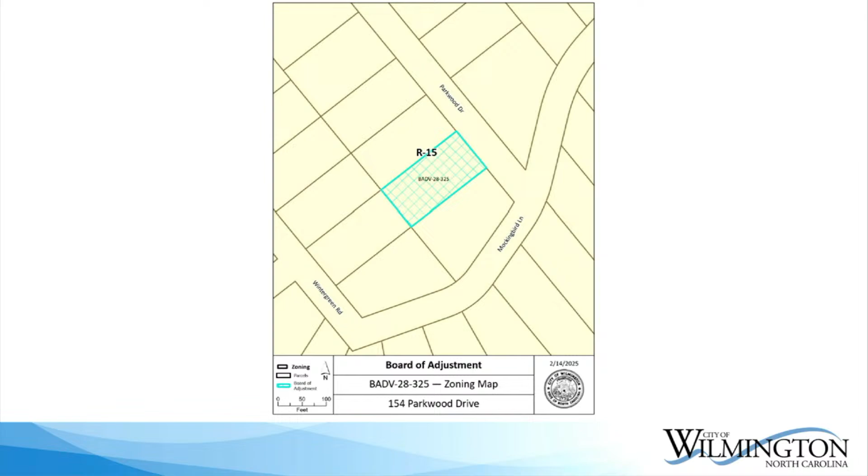On or about November 27th, 2024, the applicant received permitting approval from both City Zoning and New Hanover County Building Safety for the construction of a detached 11 by 30 lean-to carport with a proposed 3-foot setback to the side interior property line. In February of 2025, City Zoning inspected the subject property and determined that the structure did not comply with City Code Section 18-199, which requires that detached accessory structures shall be located a minimum of 5 feet from side interior property lines.

On or about February 26, 2025, City staff accepted an application for a variance to the required side interior setback for the accessory structure to remain as permitted. When the need for a variance is related to an error on the part of City staff, the City of Wilmington fee schedule states that no application fee is required. This matter was continued from the March 20th meeting and is set for hearing before the Board of Adjustment on May 15th, 2025. I'd like to submit the staff report and all attachments to the record. I'm available for any questions, as well as the applicant's representative, and I believe they have a presentation as well.

Any questions for staff? Okay, thank you. If the applicant would come forward.

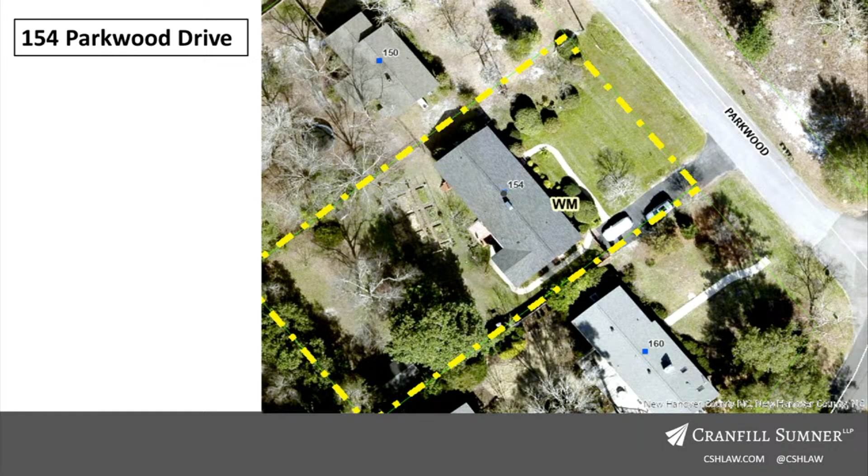And you'll see this aerial depiction of the property. I'd like to note for the board that the driveway, which pre-existed the carport, has already been there for several years and is very close to the property line. I'll also point out in this other aerial, there are 2 houses adjacent to Mr. Lane's property. One is a property with a driveway that's on the far end, the far left of Mr. Lane's property, and another is a corner lot which has not 1 but 2 driveways connecting to a separate street, Mockingbird Lane.

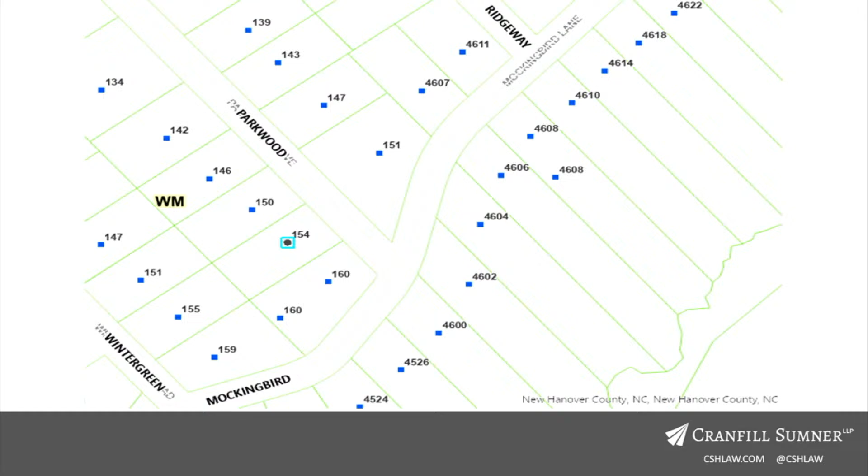They are 4 feet separating both the carport and the house. So if the carport were moved any closer to the house to comply with that 5-foot setback, those stairs would be blocking a car from entering the carport.

Now, this permit was granted due to what I think is a very understandable issue. If you go onto the county's website, and there is a link on the city's website that will eventually take you there, you'll see there is an option for accessory new structures, on a page called 'Do I Need a Permit?'

So Mr. Lane, before he even commenced building this carport, was trying to figure out the rules. He looked at this site and selected carport. There, in his layperson's opinion, and in my opinion as an attorney as well, he saw a requirement for structures greater than 400 square feet. What we saw a moment ago was a carport that was 330 square feet. So in Mr. Lane's mind, he didn't need a permit to proceed with building the carport.

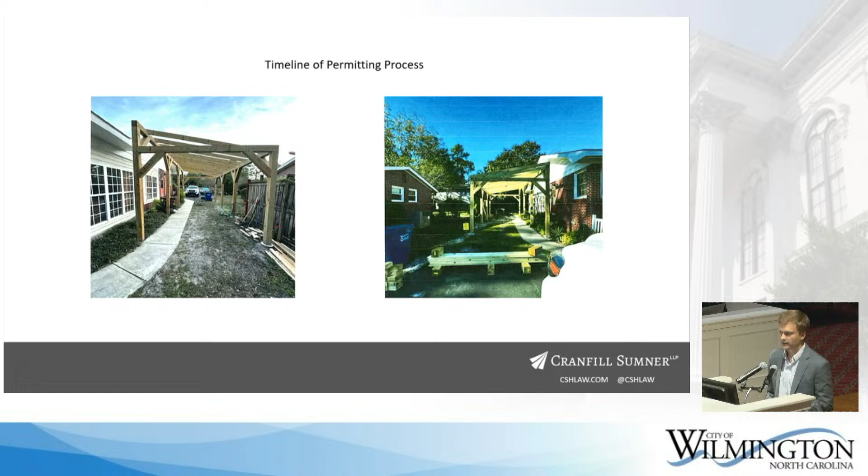A little more context: this interpretation, I think, was due to another misunderstanding, but a legitimate one, of the rules that existed, particularly at the time he was building this late last year.

Mr. Lane was informed that if he coated the carport with special fire-resistant paint or made a 1-hour fireproof wall, he could potentially keep his carport where it was. Due to cost and other considerations, he ultimately decided to dig up the carport and move it over a foot to comply with the city's directions.

I'm interested in what he said about the fence. I don't understand what you mean when you said the fence goes 6 inches down into the ground. What do you mean by that? You can approach, yes.

I was referring to a 6-inch silt fence. My client understands the details a little bit better than I do. It was my understanding that it was designed to prevent water damage. As far as where it goes, I don't have that information. Well, I can tell you that doesn't make a lot of sense. I can understand where the posts that he put up to support the prefabbed panels may be sunk that far, but the actual fence is not.

Don't get me wrong, I don't expect y'all to make him tear this down, and I honestly don't want him to tear it down. I don't want to cause that problem with my neighbor. But somebody made a mistake—I don't know, city, county, whoever—and this really needs to be corrected, because the next person in my situation shouldn't have to go through this. I can't tell you how much stress this has caused me since September, thinking about the possible cost that's going to occur to me down the road somehow. But anyway, thank you.

Forgive me, this is sort of a question for both of you, because I noticed the downspouts and the drains. The gentleman for the applicant indicated the water doesn't go towards your property, ma'am. On the other hand, we've had a lot of rain. So two questions: for him, where does this water go, if you know?

And for you, ma'am, considering we've had a lot of rain, have you seen evidence of this system failing to keep the water from flowing towards your property? I know your property's a little bit downhill. We noticed that, but—well, thank you.

Actually, I went out yesterday when we had the big rain, and with that it was fine. I have no problem with it the way it was. I guess my concern is I just don't know when the next hurricane's going to come, and that type of flooding. The rain storms we have, which are usually quick, could be very intense but quick. But he's correct, we do have sand and it does drain.

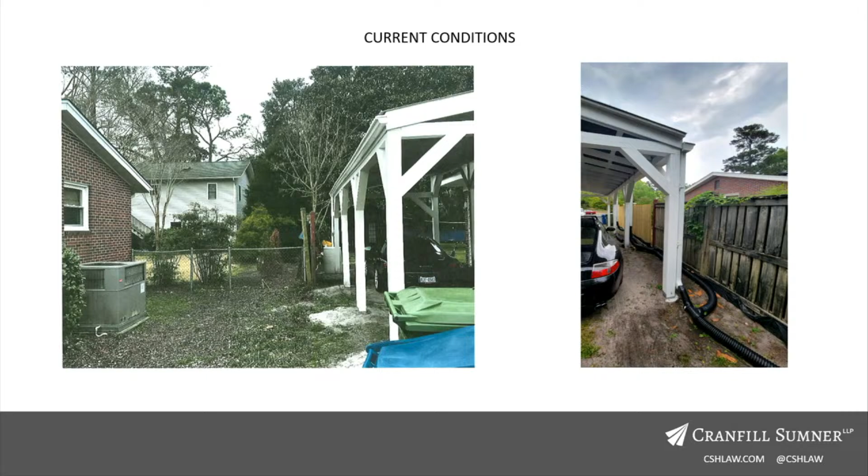As far as those black pipes or whatever they are that are coming out, I really hadn't noticed those. I'm not sure, because I was told—since I don't go onto his property—that there were going to be rain barrels. So I'm not sure where the rain barrels are as opposed to this black tubing I'm seeing.

Thank you. So to add on to that, I was in communication with my client, and he informed me that the roof gutters drain into 4-inch plastic corrugated piping to the center of Mr. Lane's yard. That is not just moving it further down the property line—it goes to the center of the yard.

And I would also—I think the board may have used this tactic in the past—suggest that they can attach certain conditions if any particular aspect of a variance is something that they think deserves a little bit more caution.

And again, as a thank you to Ms. Parham, I think she mentioned earlier the right result might not be to make my client take down the carport. Again, Mr. Lane attempted to do everything right. He went through the permitting process, he called people, he made adjustments, and we find ourselves here today. We are grateful to the city for waiving the application fee, in addition to giving us this opportunity to try to make this situation right.

Thank you. Anything further from Mr. Lipscomb? Thank you. Anything from the city?

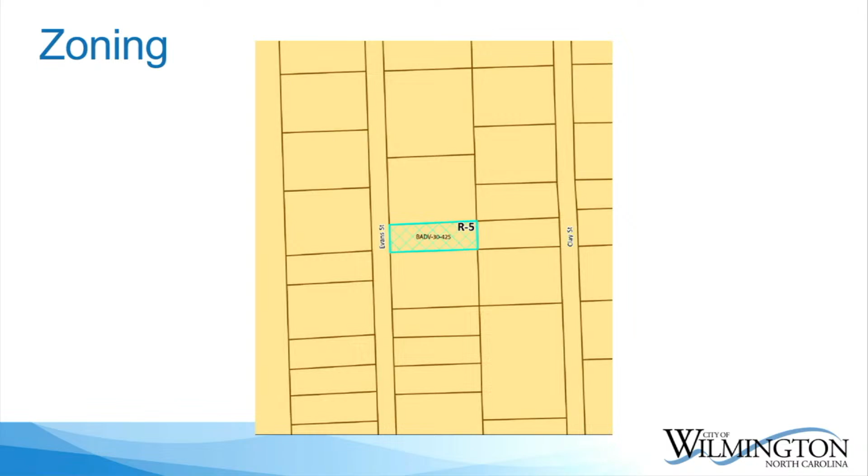Yes, please. The subject property at 420 Evans Street is zoned R5 and is a vacant lot of record in the R5 district. That district requires newly created lots contain at least 5,000 square feet and have a minimum of 50 feet of width. The subject property, though, is a lot of record in the Fox subdivision, made up of 2 lots, recorded in New Hanover County Registry, Map Book 2, page 108 — you can see that lightly on your screen. It's from 1926. Lots within that section of the Fox subdivision are generally 33 feet wide and 92 feet deep, which is consistent with the dimensions of the subject lot.

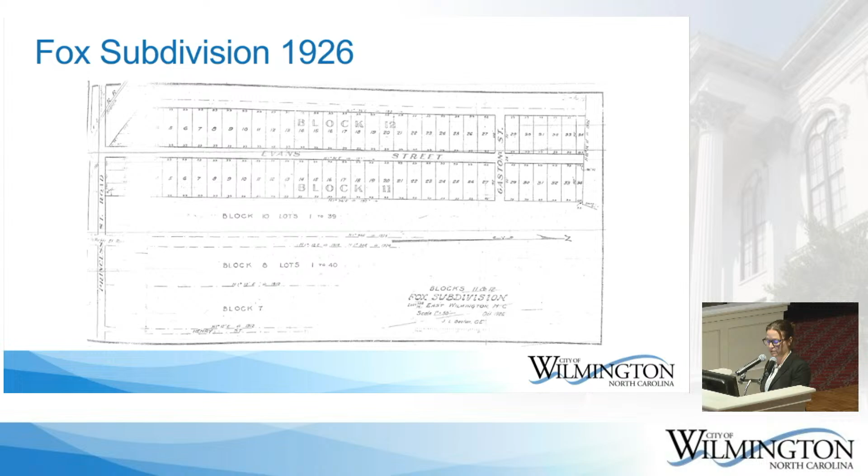The applicant proposes to develop the property for residential use and has requested a variance to allow the new structure to meet a 5-foot side yard setback rather than the 7-foot setback required by City Code Section 18-28. The subject lot is 17 feet narrower than the standard R5 lot width of 50 feet, and you can see the required dimensional standards for the R5 district.

The applicant stated in his application that strict enforcement of the ordinance would significantly constrain his ability to develop this lot. And you can see, based on the lot dimensions, it's really more consistent with the standards for an R3 district, and those are the setbacks he's requested on the side yard.

In the applicant's narrative, he also stated that the proposed use would be a duplex. However, the lot is not large enough to accommodate a duplex in the R5 district — he would need at least 7,000 square feet — so this would be for side yard setbacks for a single-family dwelling. This matter was set for hearing at the April 17th meeting and is before you today on May 15th, 2025. I'd like to enter the case summary and all attachments into the record, and I'm happy to answer any questions you may have of city staff.

Ms. Thurston, so this is for a duplex, which would not be allowed even if a variance were to be passed — is this not something we should be requesting a variance to the dimensional standards for a duplex? No, the lot is not large enough to accommodate a duplex. He requested a variance to the side yard setbacks, so it would be for a single-family dwelling. Okay, thank you.

And this lot is consistent with other lots in the area? It is. This is one of many Fox subdivisions. You can see blocks 11 and 12. There are Fox subdivisions, block 9, 8, 7, just all in that area. Some of them do meet the 50-foot lot width, but many of them were developed as 33-foot wide lots.

Thank you. Why do we automatically assume it's a single-family dwelling since he asked for a duplex? Because that is all he's allowed to build there based on the lot area. But he hasn't actually changed his request. No, he's not present to address that either. So if we approve the variance, the only thing allowed based on the variance would be a single-family dwelling?

Right, and those aren't necessarily the lot lines. So the lot directly to the south is actually a double lot. They built in the middle of those two lots, so they kind of effectively combined them, but those are really two lots of record. Because they were developed that way, the tax department issued a single parcel ID number rather than two separate tax bills. But very few of the lots in this subdivision have actually been formally recombined, so most are still 33 feet in width.

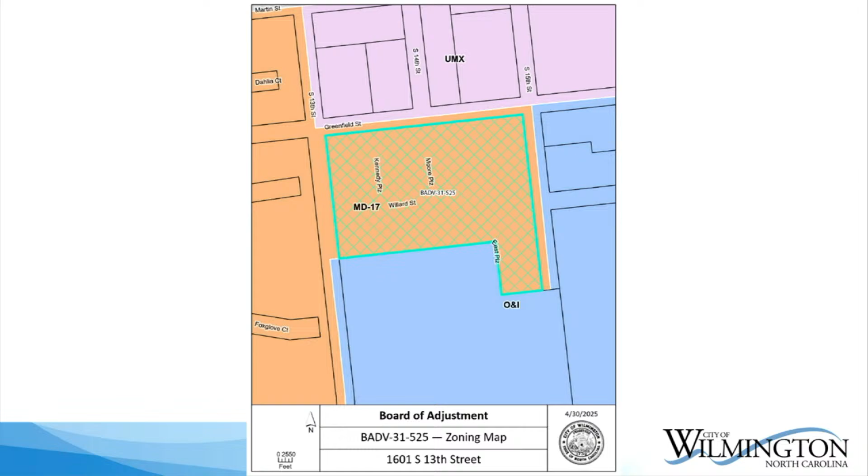All right, good afternoon, Mr. Chairman, members of the board. I'm Grace again, Zoning Planner 1 for the City of Wilmington. Item 3 today, we have the subject property, 1601 South 13th Street. It's zoned high-density multiple dwelling residential, the MD-17 district. It contains a multifamily housing development known as the Houston Moore Apartments currently.

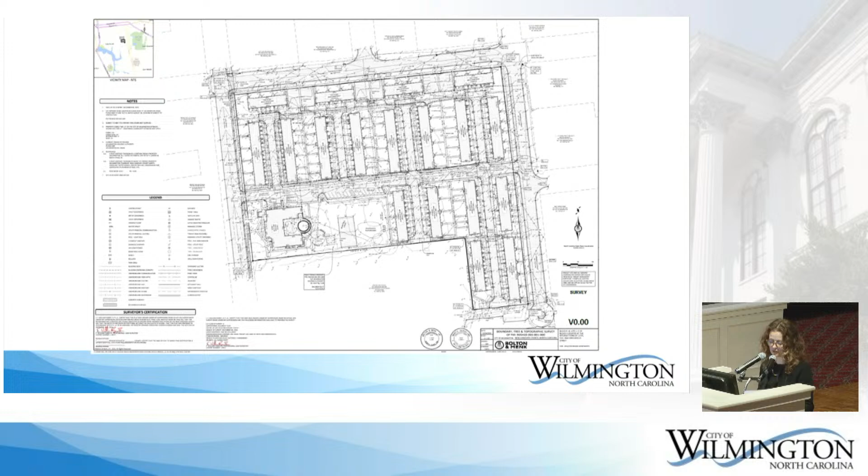On or about April 22nd, 2025, a redevelopment plan for the demolition of all existing structures and new construction of 2 buildings with a total of 200 units was submitted for preliminary review by the city's Technical Review Committee. The proposed new construction would occur in 2 phases and would involve the removal of up to 3 specimen trees.

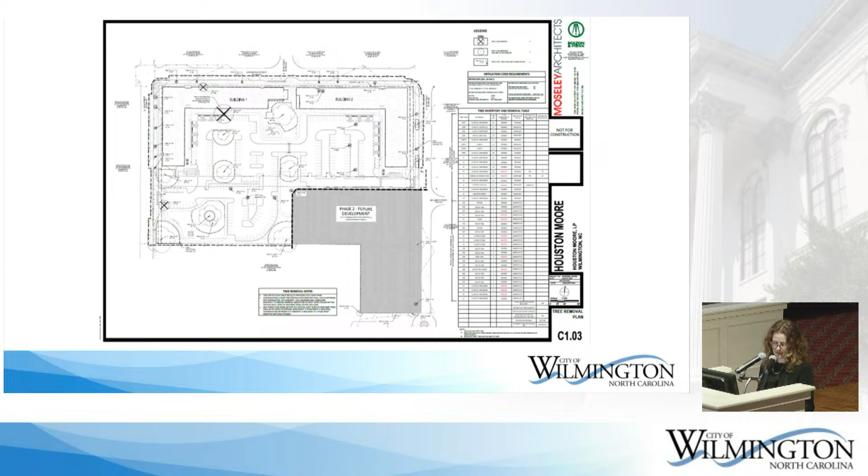Pursuant to Table 18-316-1 of the Land Development Code, any live oak with a minimum diameter breast height of 24 inches shall be classified as a specimen tree. Land Development Code Section 18-316B states that protected trees existing on a site prior to development or redevelopment that meet the size threshold prescribed in this table shall be retained. This section further states that removal of specimen trees shall only be authorized by variance from the Board of Adjustment. Section 18-316D states that disturbance within the critical root zone shall not exceed 20% of the critical root zone protection area, or extend any closer than 1.25 feet for every inch in trunk diameter.

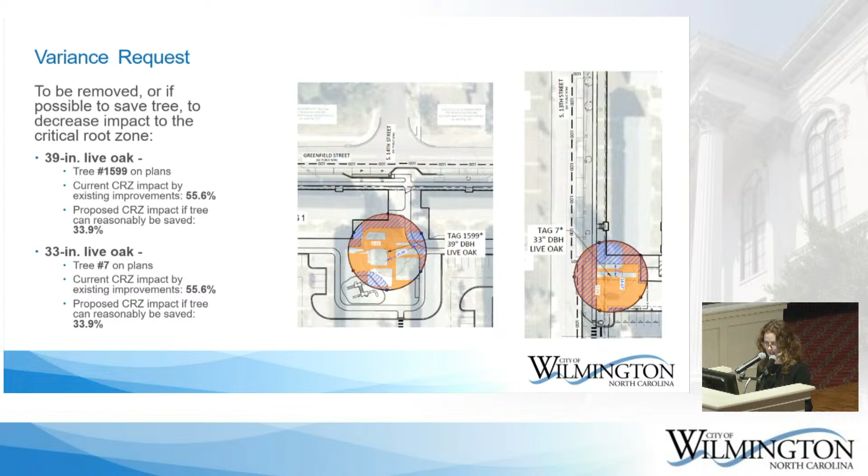According to the applicant, the property contains 9 specimen trees that would be impacted by the proposed plan of development, proposing either removal or impacts to the critical root zones with the intent to retain viability of the trees. The applicant has requested a variance to Land Development Code Section 18-316 to remove or impact the critical root zone of the 9 specimen trees as follows: 1 38-inch live oak tree to be removed, and 2 live oak trees, 39-inch and 33-inch, with proposed critical root zone impacts as shown, to be removed or, if possible, saved to decrease the critical root zone impact. For the remaining 6 specimen trees, the current impact versus the proposed impact would be reduced as shown on the screen.

The applicant states that the location of existing specimen trees within the building envelope significantly constrains redevelopment efforts. The trees were integrated into the original site design for the existing multifamily development and have grown so much since that the applicant believes their location, combined with existing site conditions, creates a substantial design challenge for the proposed redevelopment project.

On or about April 1st, 2025, staff accepted an application for a variance to the tree preservation standards for a property in the MD-17 district pursuant to Land Development Code Section 18-316. On or about April 9th, 2025, the applicant met with staff to provide an updated site plan which reduced the impact of the proposed redevelopment plans to the critical root zones of the specimen trees.

This matter is set for hearing before the Board of Adjustment on May 15th, 2025, and I'd like to submit the staff report and all attachments to the record. I'm available to answer any questions from the board, and the applicant is here as well with a presentation.

I do have one question regarding the 6 trees with disturbance in the critical root zone. Since the amount of disturbance is decreasing, is a variance necessary for those 6 trees? No, if the impact is decreasing, they do not need a variance for that.

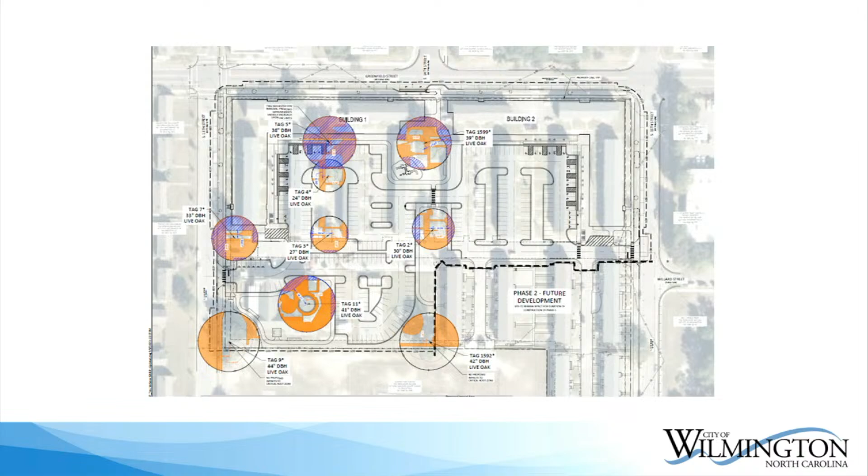One other thing: I noticed there are other little circles around the property. Are those indicative that they're going to be putting other trees in? I ask because in the picture of the original site, what will be redeveloped, other than some of these specimen trees which have grown, it looks pretty denuded, frankly. Is the applicant going to be adding any greenery as they build these buildings? Yeah, they're currently going through TRC review for the redevelopment plan, and there will be additional landscaping requirements addressed through the TRC process. I see, okay, thank you very much.

And did I see correctly that the other 2 trees that might be saved would actually end up with less impact on their critical root zone? Yes. There was one slide that showed that? Yes, let me go back.

Any further questions for staff? Okay, thank you.

The applicant would come forward.

Good afternoon, Chairman Moore, members of the board. My name is Sam Frank. I represent the applicant. With me today are Amanda McLeod, a senior project landscape architect with Bolton and Menk, Rusty Snow, who represents the developer, and Tyrone Garrett with the Wilmington Housing Authority. Let me respond to a couple of the questions you asked before I delve into my presentation.

This design did evolve between the time we made the initial application at the beginning of April and today. It evolved all for the positive. All of the changes that Ms. McLeod was able to incorporate expanded the amount of critical root zone that could be preserved for each of the trees.

Furthermore, we learned since we applied at the beginning of April that in a scenario where we provide less impact on the critical root zone for a specimen tree, meaning both with regard to the area and the distance from the trunk to the closest impact, no variance is required. So the 7 trees that are absolutely to be saved on this site are no longer the subject of our request to you, and I apologize for any confusion. At the time we filed the initial application, we didn't know, and that's why we included them.

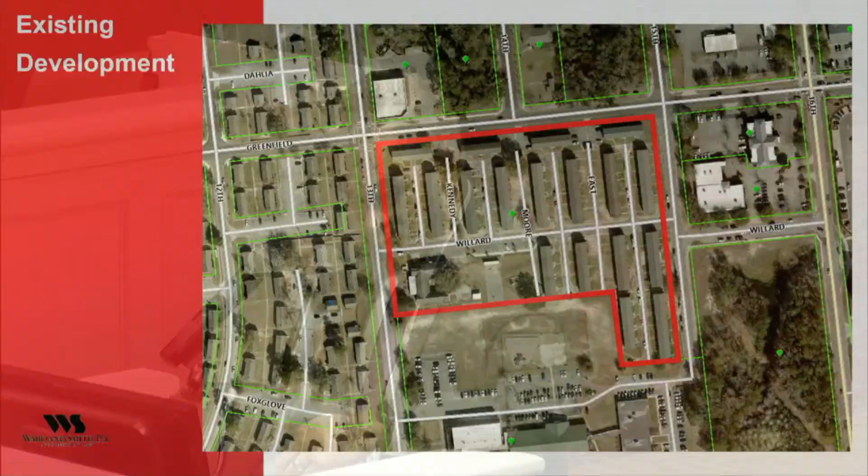Here we go - satellite image of the site as it sits today. The plan for redevelopment between Houston Moore in collaboration with the Wilmington Housing Authority contemplates replacement of buildings in a different location than where they sit now. That affords much greater opportunity to incorporate green space into the site than we have today.

As you can see, the large darker green trees shown are the existing specimen trees. The 2 that are variables shown on the plan, which we're asking to remove, are in the center between building 1 and 2 at the top, and at the base of the downward leg of building number 1.

This proposed redevelopment would breathe new life into the community and allow for a significant improvement to and expansion of much-needed affordable housing. The applicant is ready and willing to proceed with the project and has just recently obtained and secured critical state funding necessary to make it possible. Another step necessary to make it possible is your consent today to remove those 2 specimen trees.

Here's the tree survey for the site. Those numbers and words are not entirely easy to read. I'm going to get to an image in a minute that will show more clearly where the specimen trees are located and the impact on their critical root zones.

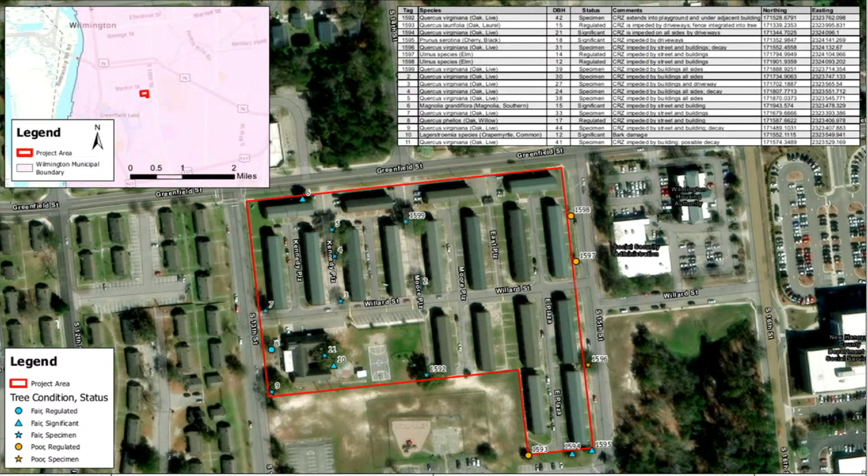The trees depicted as yellow stars on this image are the specimen trees. As noted earlier, none of those 9 specimen trees exist today with a protected critical root zone that would comply with the current code. Not only was the development built long before we had a code designed to protect specimen trees, but the trees were much smaller at that time and have grown since. So as they sit today, each of those 9 trees has a significantly impacted critical root zone.

This is the site plan again for the proposed redevelopment. It depicts the location of the 2 new buildings and the other improvements on the property. The orange color shows the impact of the critical root zone on each of those specimen trees as it's built today, and the blue hatch shows the proposed development's impact on the critical root zones of the trees. I'll show you in a minute an image that also shows the distance between the closest impact and the trunk of the tree.

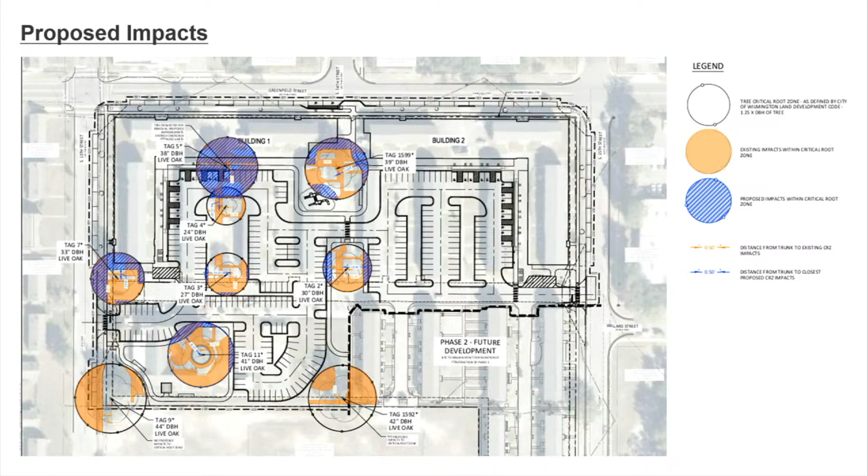These are the two trees we hope to save if we can. I really appreciate this image because it demonstrates just how close the existing improvements are to those trees. Remarkable that they have survived in that condition as long as they have.

Again, these are nice trees. They will enhance the development if it's at all possible to save them. They are also very, very close in terms of proximity to the future buildings, and therefore, with uncertainty about our ability to save them, we ask you for permission to remove them.

With that said, I'd like to introduce Amanda McLeod to talk to you a little bit more about why. How did we design this? Why did we design it this way? Evolution of the design and the like. Amanda is a senior landscape architect with a reputable company here in town and much more familiar with the nuances of the detail of the design. I encourage you to ask her questions about that to the extent you have them.

Good afternoon. My name is Amanda McLeod. Like Sam mentioned, I work for Bolton & Menk. We're a landscape architecture and civil engineering firm here in town. My address is 1502 Castle Street. I've been a landscape architect here in town for about 12 years and also the project manager for this project. So I'm going to get into a little bit more specifics about the design and the process.

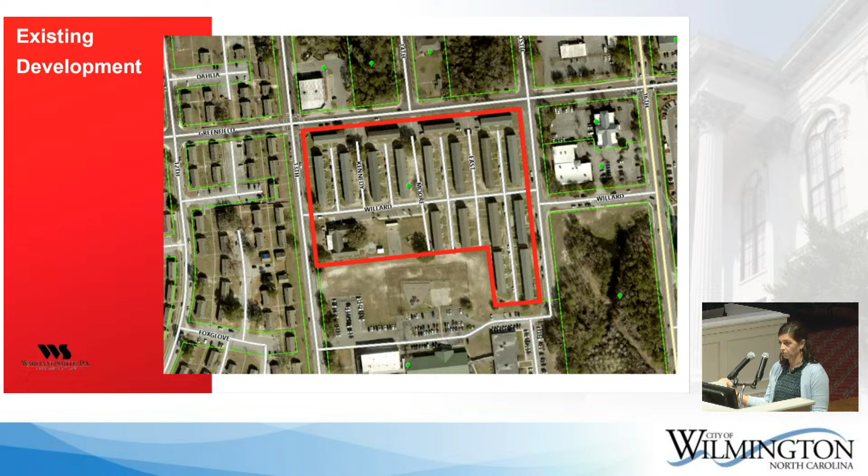Circling back to this graphic, because I think it really starts to tell a significant story here about these trees. Like Sam mentioned, these trees do not meet current code as they exist on the site today. With 12 buildings on site in the phase 1 boundary, there's parking, sidewalks, steps, and utilities associated with each one of those 12 buildings. So looking at how we're approaching the redevelopment, we've consolidated into 2 buildings, which allows us to consolidate the improvements into the areas without the trees. The orange areas depict all of the encroachments or impacts to the critical root zones of those trees as they stand today, including steps, parking areas, sidewalks, and utilities underneath the trees.

The blue areas depict what we can envision to be our future encroachments based on this proposed site plan. In all cases, with the exception of tree number 5, which is entirely blue, we have significantly reduced the amount of impacts to the critical root zone. The distances of existing impacts to the closest point within the root zone are anywhere from 6 inches to 13 feet today. Our proposed impacts have a closest distance of 12 feet, so we've doubled the distance from the trunk to the proposed impact in all cases except for tree number 5.

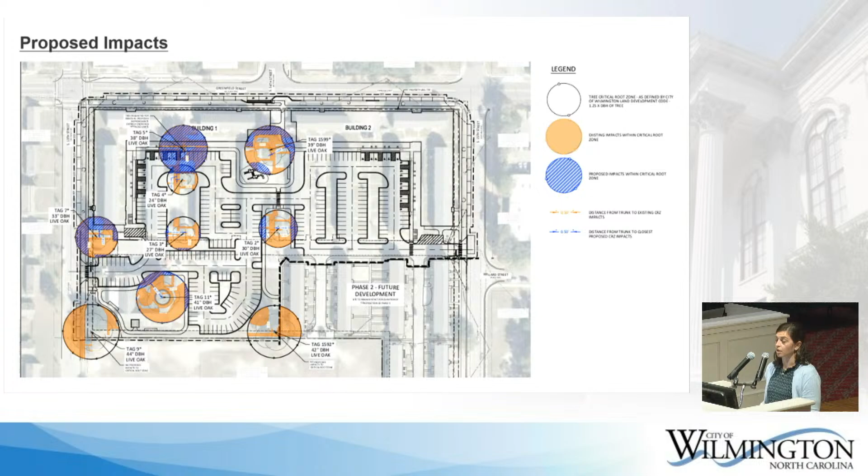Also, by area, we've significantly reduced the critical root zone impacts. Current impacts accommodate 53% of the critical root zone, and our site plan proposes only 17% of impacts to the critical root zone. That's a lot of numbers, but I think the graphic does a pretty good job explaining that. This is extremely difficult to read, but it shows our math behind the numbers and the design.

And then lastly, to just speak a little bit more about the progression of the site planning that we've done from the time of being brought onto this project with the Housing Authority.

The trees, without a doubt, drive this entire process and this entire site plan. From the beginning, we've engaged discussion with city staff, also arborists, both hired privately, and then we also met the city arborist out on site to discuss the trees, their health, their condition, and if they would survive if we do try to save these. The answer is yes. They're live oaks and they're pretty hardy.

So the trees, though they are a significant challenge to work around, they're not the only challenge that we have on this site, so we do have to consider all of these things when we're designing. In the southeast corner of the site, we will be preserving 6 buildings during the time of construction, so that's something we need to keep in mind while designing. We also have a utility easement running east to west through the site, just below 3 of those specimen trees.

Grading—we all know Wilmington's fairly flat, but there is actually an 11-foot grade difference transitioning from South 13th Street on the western side of the site to South 15th on the eastern portion, which doesn't seem like a lot, but when you consider tying in grades at all property corners and boundaries, that's a significant impact to design efforts. We also are not allowed to grade within the critical root zone of the trees, which also impacts the ability to work around grading.

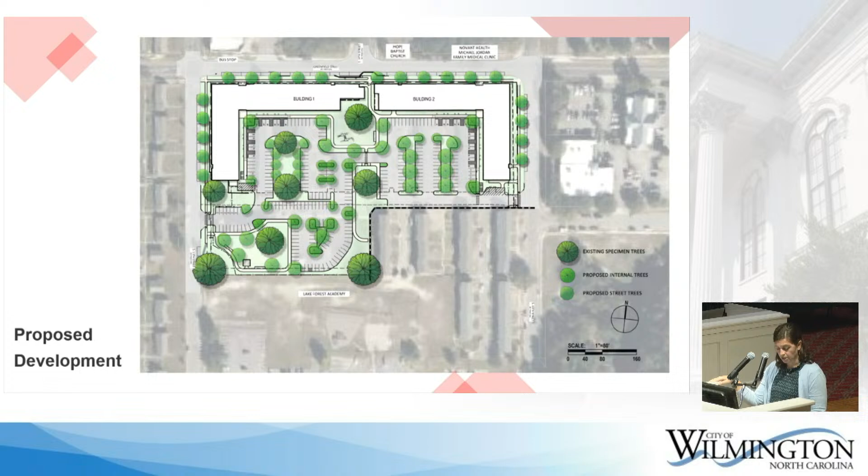And again, grading—I've already mentioned that. We're working around that. We're providing permeable paving and infiltration on the site so that we do not have to take up space with a pond, which would further impact our trees. Lastly, landscape will of course be improved and will meet all city codes per the current UDO.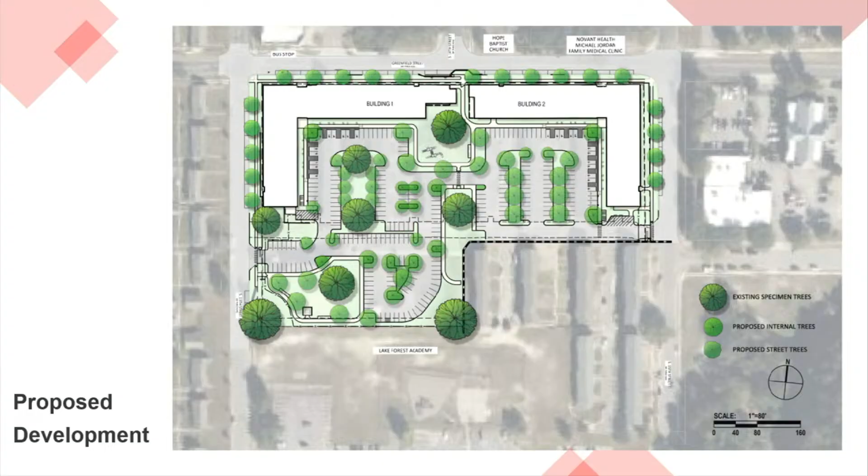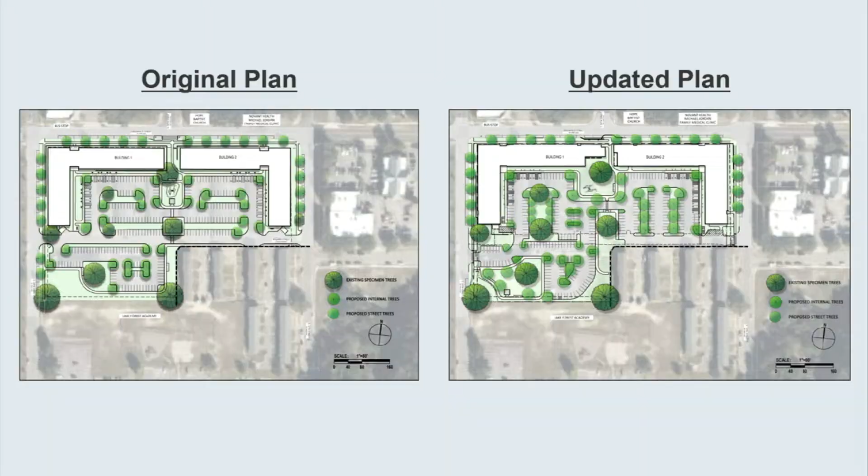We have worked diligently to work around these trees, and we hope you'll consider our request today. Thank you. Any questions? Thank you.

If I may speak briefly about the critical 4 factors that are the basis of your decision. First, unnecessary hardship would result from the strict application of this chapter. As we've described, this is a site that doesn't comply with the code today. It is really unusual to have 9 large mature specimen trees on a high-density urban site such as this.

Amanda and her team have done an exceptional job of designing around those trees and finding a way to protect them as much as possible. But the reality is, the hardship that would be incurred here without relief from you is that practically the site could not effectively be redeveloped. The hardship results from conditions that are peculiar to the property. Again, the location of these trees on this type of site is highly unusual. It's a fantastic problem to have.

As you can see by the rendered site plan for the vision for future development, this is going to take a site that does not have nearly enough green on it and has some outdated buildings, and turn it into a site that's got more affordable homes and substantially more green space than it does today. It is not difficult to advocate that that is a better end result than the condition as it exists today.

Hardship certainly does not result from the actions of the applicant. I suppose those trees could have been taken down somewhere along the way in the name of maintenance. Nobody did that. Nobody should have done that. But it's certainly not the applicant's fault that they continue to exist today. We're grateful for the fact that they continue to exist today. We did not plant them, and therefore did not create the hardship.

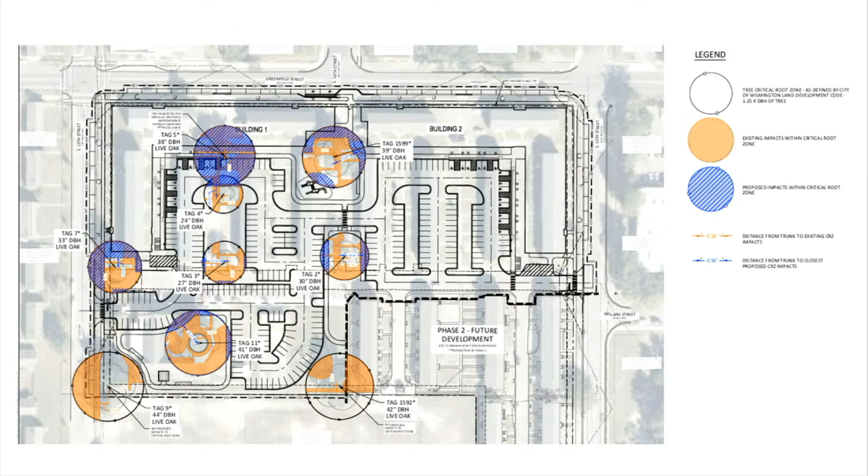Variance factors, which we've already discussed, and I breezed through pretty quickly. If you have any questions for me about our arguments on that, please don't hesitate to ask. And I leave you with an image of the proposed redevelopment as the baseline for why we're here. I encourage you to ask questions of me as legal counsel, Amanda as the designer, the developer, or the representative of the Wilmington Housing Authority who's here with us today.

Thank you so much. I have a quick question. There's a significant number of internal and street trees proposed. I think it's fantastic. Do the proposed trees meet the mitigation requirement for the 3 trees that are going to be removed?

I'm going to let Amanda answer your question. As I say, I see an expert coming forward. Those do not meet the mitigation requirements. It is going to be an extreme challenge to plant the mitigation on site. In that case, that's typically handled with a fee in lieu. We haven't gotten to this point yet, but I think staff has entertained planting mitigation trees on other sites. So those trees merely represent the next layer of landscape requirements, like parking lot trees.

Gotcha, thank you. Mr. Chairman, as you can see, it's about maximized. There's not a whole lot more to be done there. This is beyond the purview of this board, but there is some provision for relief in the code with regard to mitigation requirements when you provide workforce or affordable housing. That does not extend to our obligation to come to you to ask permission to remove specimen trees. Thank you.

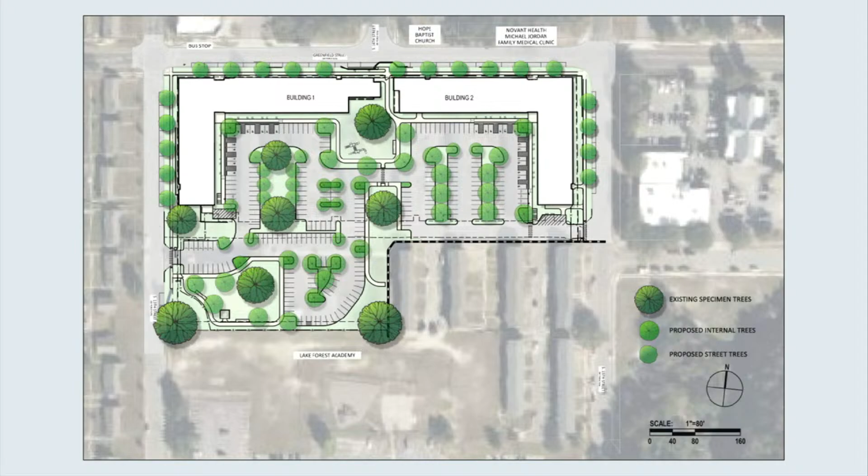As far as the second phase is concerned, we are looking at doing that as a 5-story tower of senior housing, senior affordable housing. I just don't know if we've got the space to do any more mitigation. We're certainly open to exploring it, but to kind of meet the goals of the redevelopment, which was to get to that 250 units and add another 100 units of affordable housing for the city of Wilmington, we're just a little limited by space.

Please note also that by developing in phases, this approach affords the opportunity to preserve some housing during construction, and this is a place where several citizens depend on housing. By structuring it this way in phases, we allow what will be phase 2 to be available for an additional period of occupancy than would be realistic if the thing were developed in one entire phase.

Thank you. Any further questions? Okay, thank you, yes sir. We're nearby, should anything arise during your deliberations, please don't hesitate to call on us. Thank you. I'd like to open up the evidentiary hearing.

We'll now, if anyone here has competent, material, and substantive evidence in this matter, please come forward. We'll close the evidentiary hearing and open for board deliberations.

I was not aware, but that's interesting that the question of mitigation is to some extent itself mitigated by the fact that this may be a low-income housing kind of project. That's helpful to hear, and I appreciate that they're putting in so many new trees. I appreciate the city and developer working together to amend the proposed development. I think it saves the maximum number of trees, and their landscaping is about as intense on the parcel as it can get.